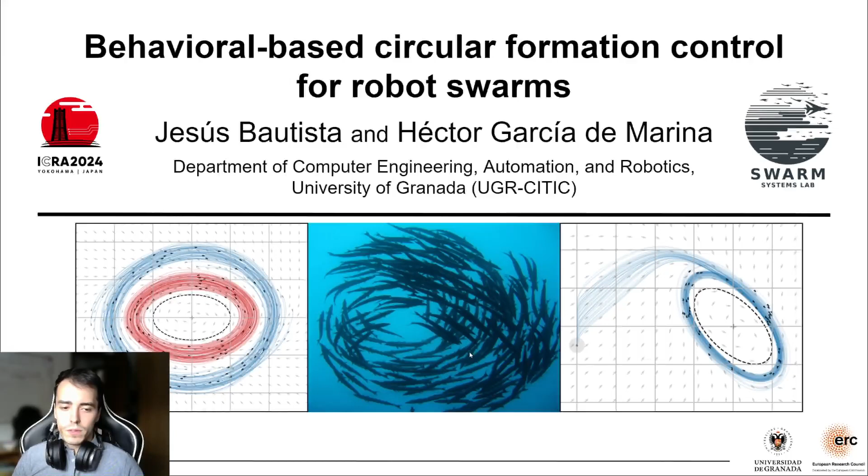Hello everyone, my name is Jesus Bautista Villar, and in this video I am going to tell you a little bit about our last work titled Behavioral-Based Circular Formation Control for Robot Swarms. In this paper, we show how to coordinate a swarm of unicycle robots with constant but diverse speeds while they orbit the same path. As you can see, our proposed method creates defensive escorting behaviors that resemble a tornado schooling of fish.

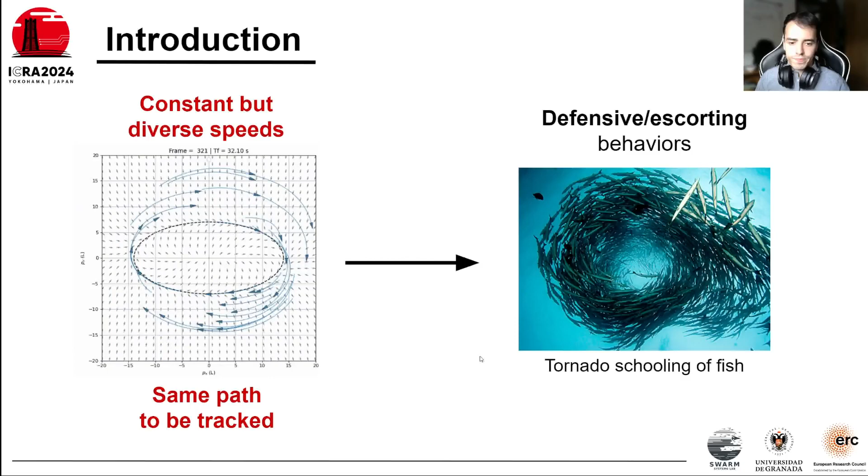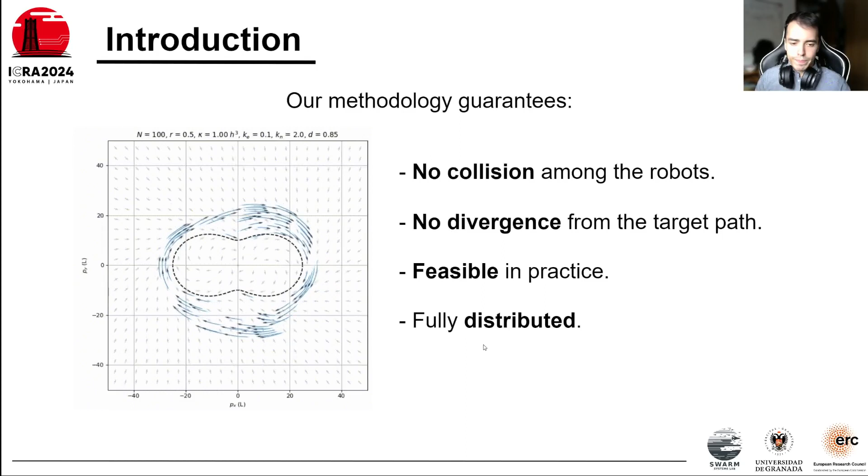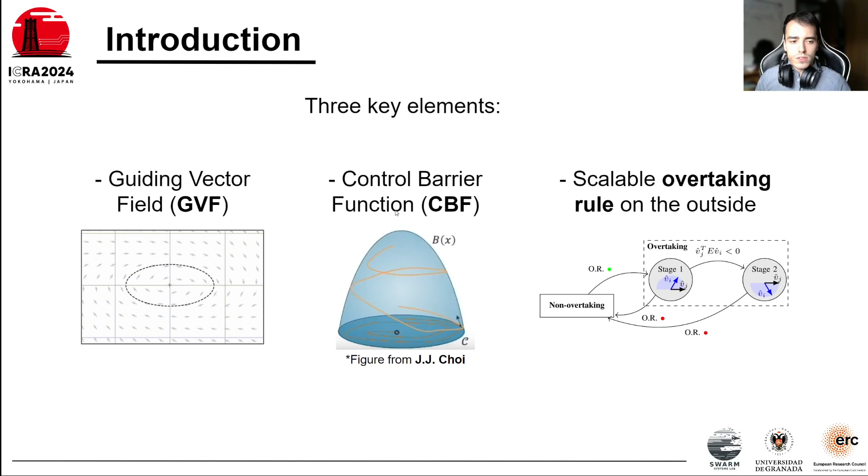Our methodology guarantees no collision among the robots, no divergence from the target path, it's feasible in practice and fully distributed. To achieve this, we analyze a scalable solution rigorously combining three key elements: guiding vector fields, control barrier functions, and a scalable overtaking rule on the outside.

CBFs are effective to avoid collisions, but literature only offers CBFs for robots that can brake. When robots are unable to brake and can only turn, standard CBFs might lead to conflicts. For instance, in this scenario, the relative velocity vector is confined between the two collision risk zones highlighted in red. Therefore, it is not clear where the blue robots should turn in order to avoid a collision with any of the green robots.

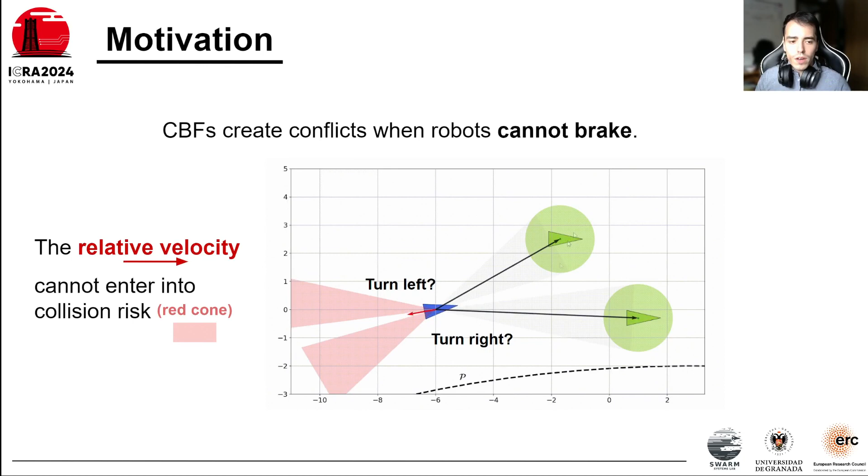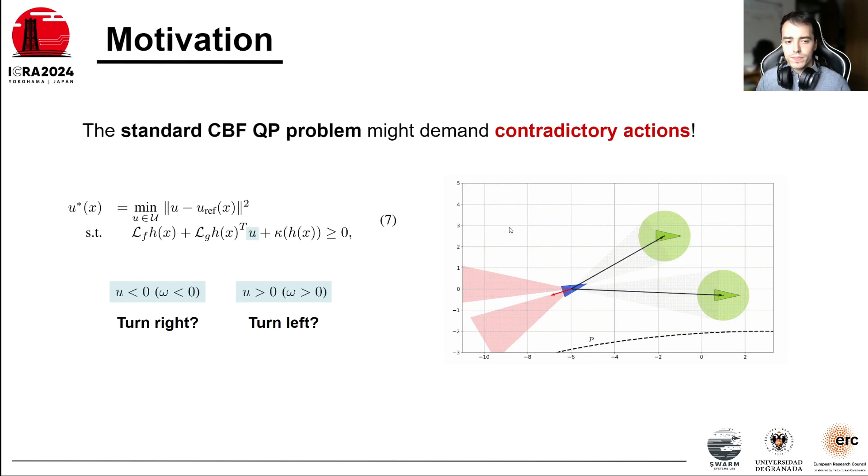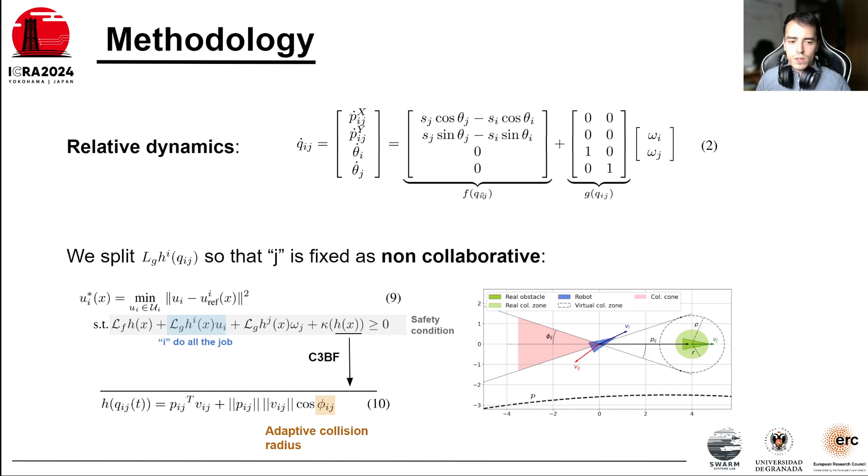Formally speaking, we have that the standard CBF QP problems might demand contradictory actions. Therefore, considering these relative dynamics, we split L_G h of i so that j is fixed and non-collaborative. In other words, i has to do all the job to fulfill the safety condition of the CBF QP problem. The CBF that we propose is a collision cone CBF with an adaptive collision radius, which, as you can see in the simulation, facilitates smooth overtakings.

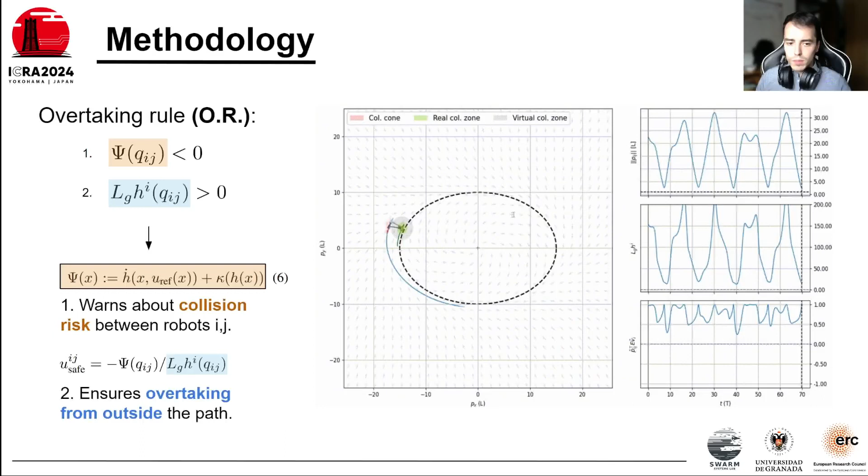On the other hand, we propose an overtaking rule that will be triggered when both of these conditions are met. Note that the first condition warns about collision risk between robots i and j, while the second one ensures overtaking from outside the path, as you can see in this simulation.

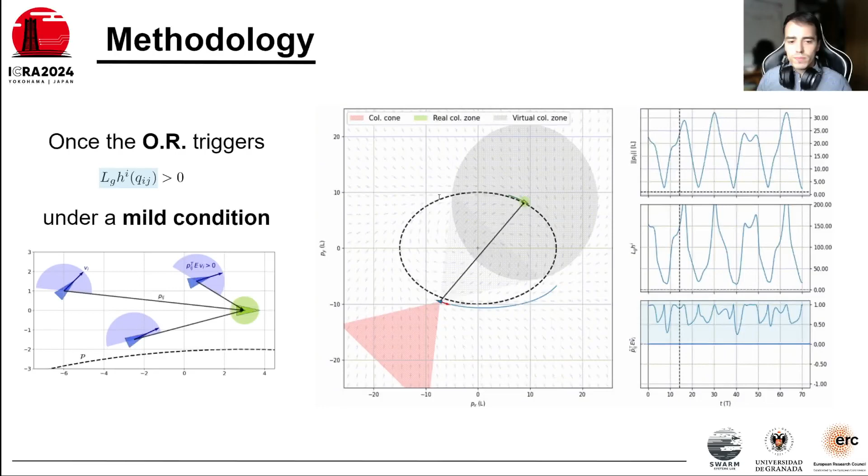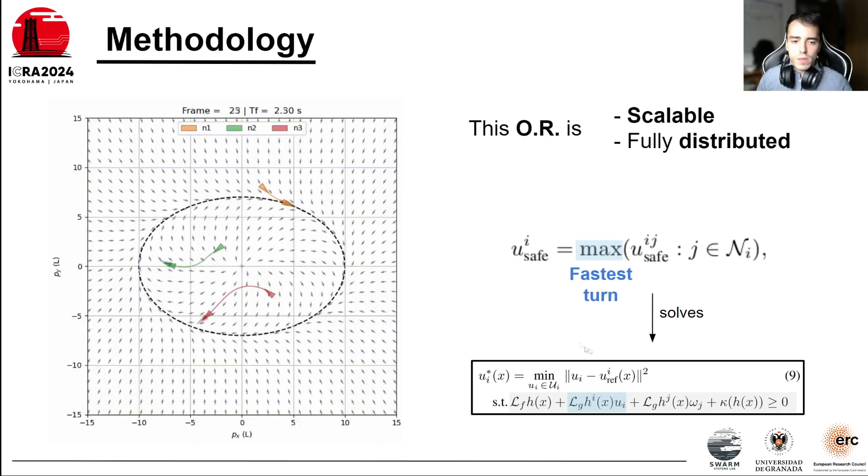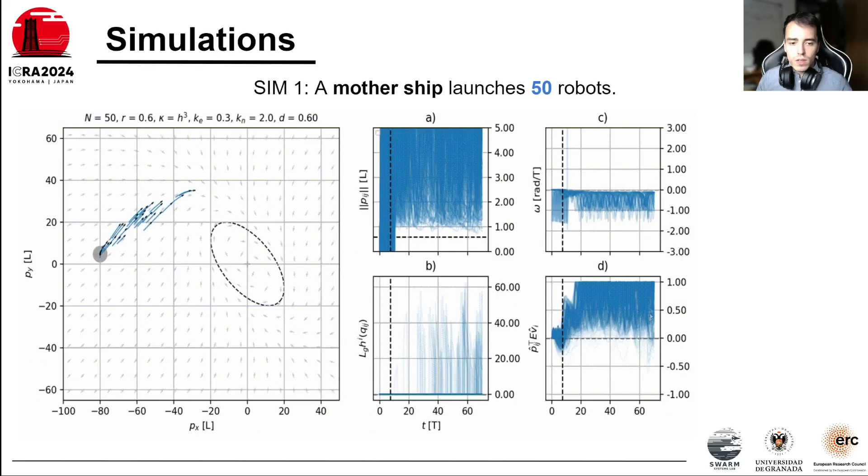Next, let me show you two interesting applications of our method. In this first scenario, we have a mothership launching 50 robots to orbit around an elliptical path. Note that once the last robot is launched at t equals 10, all variables stabilize, the safety distance is preserved, L_G h remains positive during overtaking for all robots, all the overtakings are smooth, and the mild condition is fulfilled.

In the second scenario, two teams of 50 robots travel in opposite directions. Let me note that the red robots do not know about the existence of the blue ones, so the blue team has to do all the job to avoid collisions. Moreover, since reds do not share information, blues have to consider an angular velocity omega greater than the angular velocity of every robot that they have to overtake.

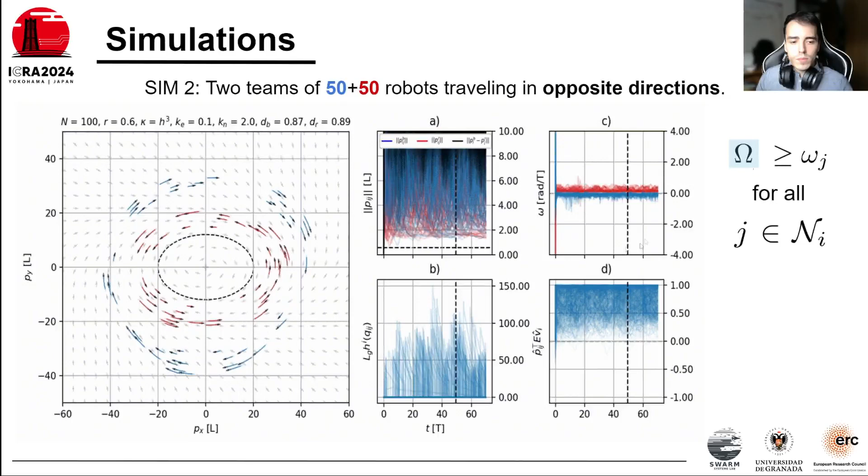In that case, every blue robot considers omega equals 10. The initial spike in the omega data axis is due to the alignment with the GVF. But then you can see that all the overtakings are smooth and that the safety distance is preserved.